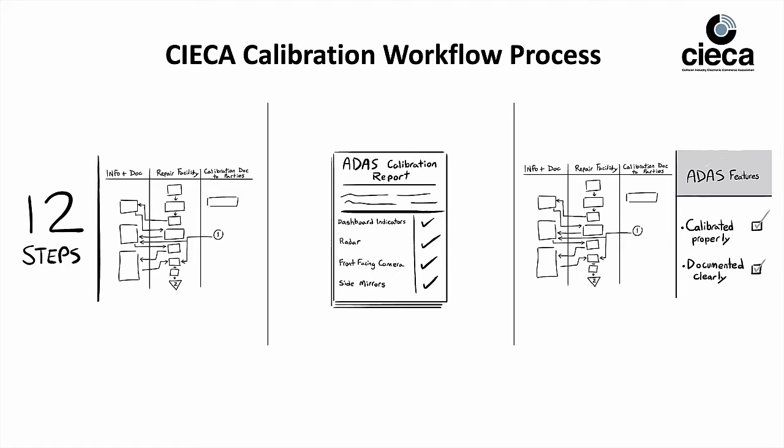The 12-step workflow starts with the identification of ADAS components on the vehicle, and then ends with the final step of completing a final scan, performing a QC process, and then reviewing the ADAS features with the customer.

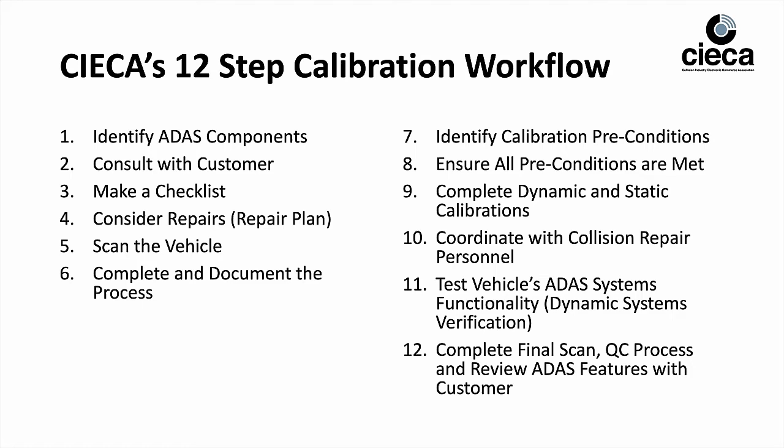In between step number 1 and number 12, you've got consulting with the customer, making a checklist, considering repairs, scanning the vehicle, completing and documenting the process, identifying any and all calibration preconditions, making sure those preconditions are met during the process, completing a dynamic and/or static calibration, coordinating with collision repair personnel, and testing the vehicle's ADAS systems functionality through a test drive, also known as a dynamic systems verification.

Over the past 18 months, my company has developed the industry's first and only end-to-end solution designed to support the implementation of CIECA's calibration workflow.

Our ADAS CoPilot is the industry's fastest, easiest, and most accurate way to identify, locate, and inspect ADAS technologies on a vehicle. Our Calibration CoPilot platform is the industry's best way to offer, manage, document, and invoice for calibrations or other ADAS-related services. And finally, our patent-pending Test Drive CoPilot platform is the world's best way to properly perform, manage, document, and invoice for post-calibration, post-repair test drives, also known as dynamic system verifications.

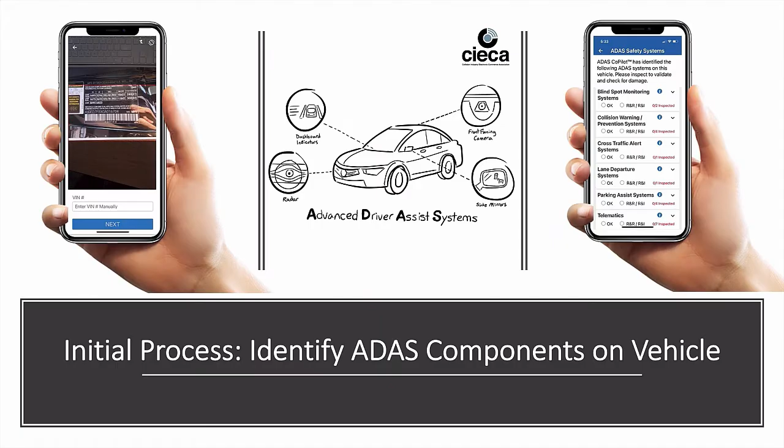As stated earlier, CIECA's first step, or their initial step in the process, is the identification of the ADAS components on a vehicle.

In seconds, our ADAS CoPilot mobile app identifies all ADAS components on a vehicle by simply scanning the barcode. This will save repairers and calibration personnel tons of time.

ADAS CoPilot also provides users guidance on where ADAS components are typically located, to help them locate ADAS components quickly.

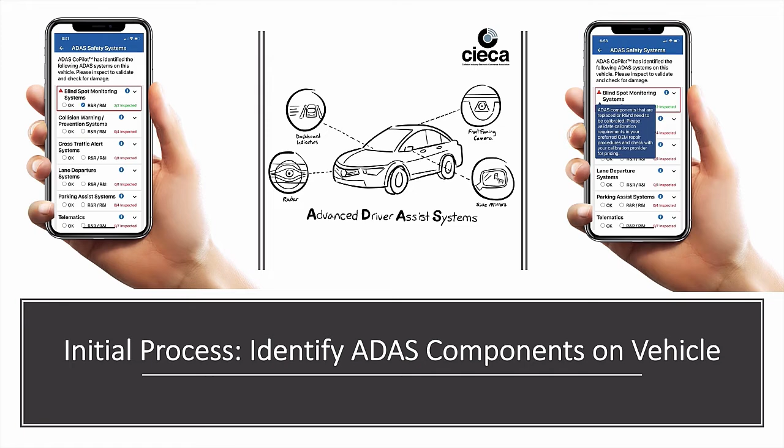Now, if during the inspection of the vehicle the user identifies ADAS components that need to be replaced or R&I'd, ADAS CoPilot will flag that component as needing a calibration. ADAS CoPilot will also then recommend the shop access the appropriate OEM repair procedures and contact their calibration provider for pricing.

The next step: consulting with the customer. We recommend shops use ADAS CoPilot to educate the customer about their vehicle's ADAS systems, the repair, as well as the calibration requirements for that vehicle.

Shops can even share the detailed ADAS inspection report with the customer. Next, make a checklist: the ADAS CoPilot inspection report is automatically created and emailed to the appropriate shop personnel.

We recommend the report get auto-emailed to the shop's repair planner, so he or she can get a head start on research and the repair plan. The report can also get auto-shared with the calibration provider, so the calibration provider can prepare for the calibration and any other services they are going to perform for the shop.

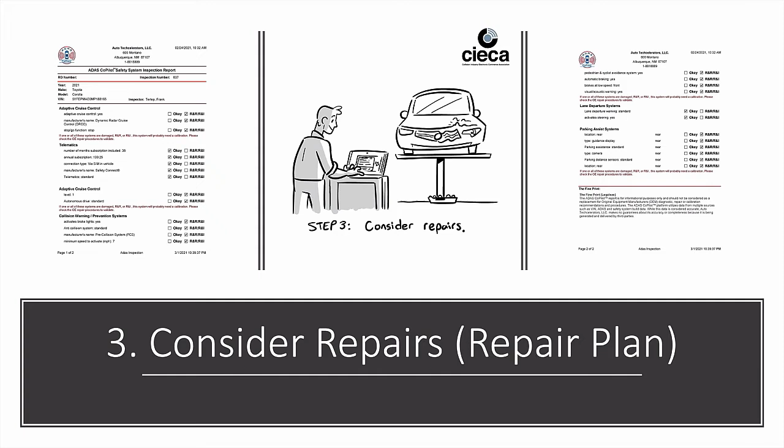Workflow step number 3: consider the repairs. Since the ADAS CoPilot inspection report is auto-emailed to the repair planner, it will reduce the time for that repair planner to do the research and complete an accurate repair plan.

Step 4: scan the vehicle, assess and address any diagnostic codes, and document the results. There's good news: all of our solutions have been designed to work with any scanning solution. So no matter if you use asTech, AirPro, Opus, or any other aftermarket scanning device or tool, it can work with any of our solutions.

Workflow step number 5: complete and document the process. This is where our Calibration CoPilot platform shines. Once a detailed repair plan is completed, the shop, through their CCC ONE system, can schedule the calibration and other ADAS services with their calibration or mobile service provider.

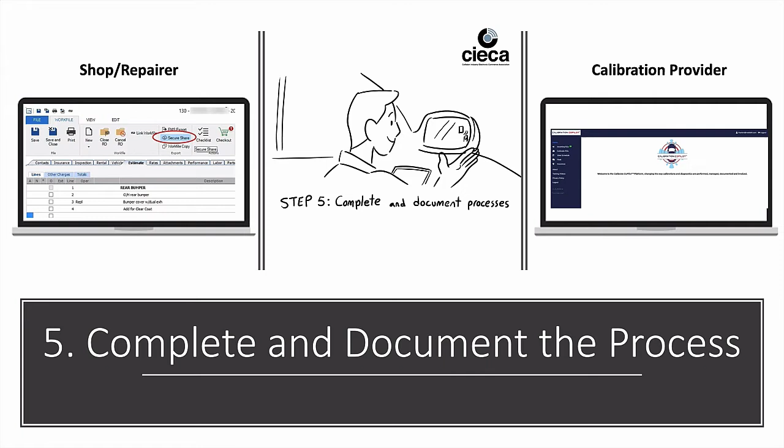The calibration or mobile service provider can receive this service request on their PC, on their laptop, on the tablet they're using for calibrations, or on the Calibration CoPilot mobile app.

The shop can then also use the Calibration CoPilot platform to view pricing and select the services they need from their calibration provider. The shops can also share the RO lines with their calibration provider so the provider knows what repairs were performed on the vehicle they are going to calibrate.

Repairers can then create and download an estimate related to the calibration or other ADAS related services needed on a vehicle. We do this early in the process so the repairer can get early approvals and reduce supplements.

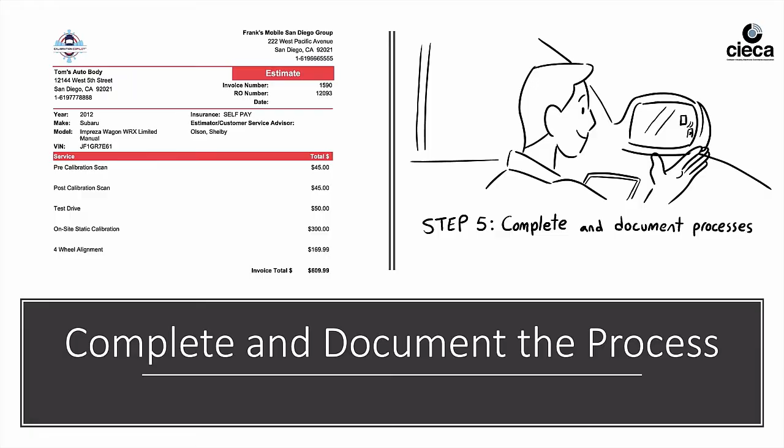CIECA workflow step number 6, perform post-repair scans, address and clear codes. As I stated earlier, all of our solutions have been designed to work with any scanning solution.

Workflow step number 7, identify all calibration preconditions. Our Calibration CoPilot platform provides the calibration or mobile service provider the ability to create customizable precondition checklists that allow for uploading and storing of images, videos, PDFs, and any other file types.

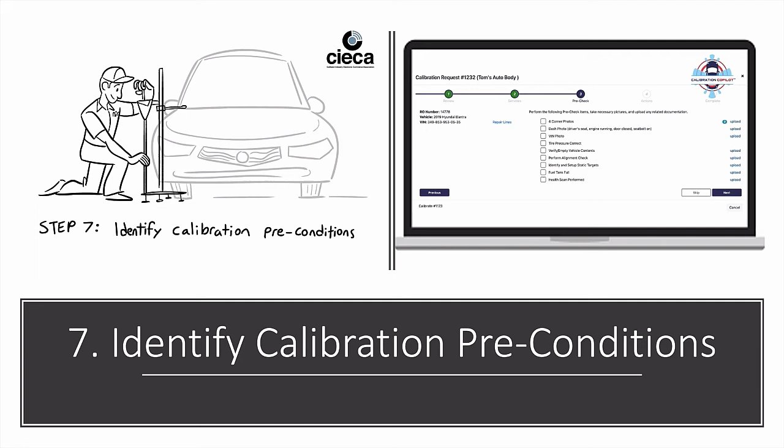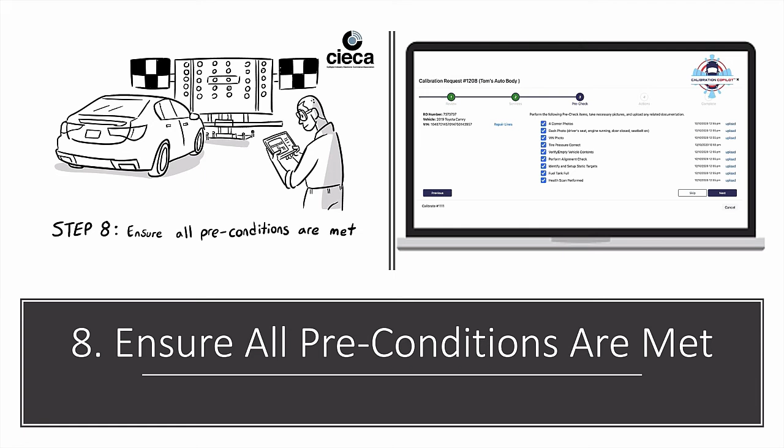Workflow step number 8, ensure all preconditions are met. With our Calibration CoPilot platform, as each calibration precondition is met, they are checked off and marked with a time and date stamp. Images, videos, and other files are uploaded, stored, and immediately shared with the shop or the customer.

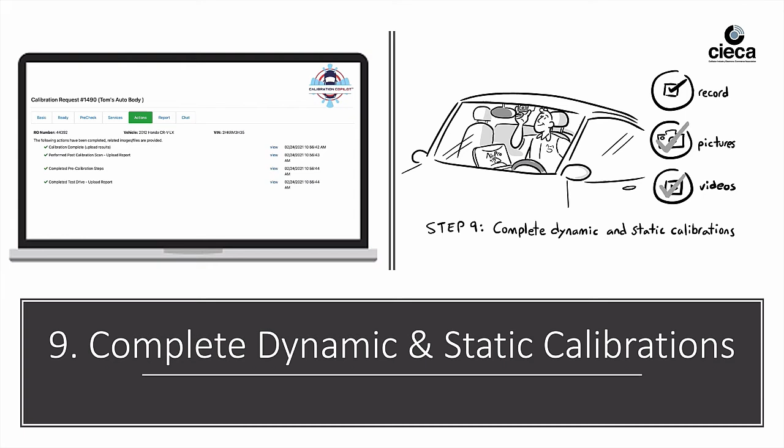Step number 9, complete dynamic and/or static calibrations. Once the dynamic and/or static calibrations are completed, reports, screenshots, images, videos, and other files are also uploaded, stored, and again, immediately shared with the shop. All actions are time and date stamped.

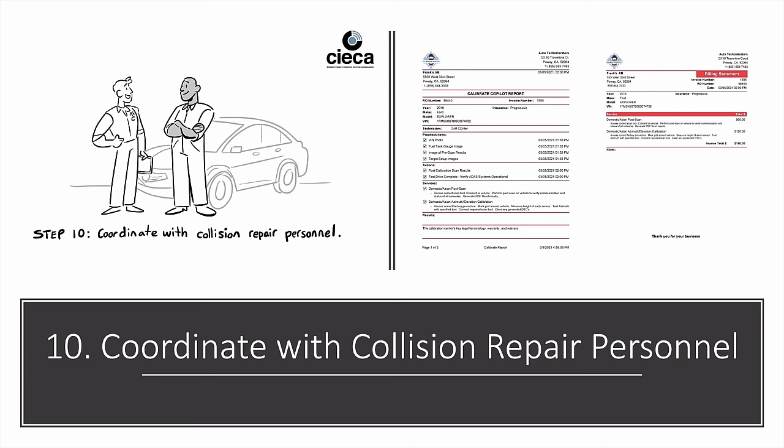Step number 10, coordinate with collision repair personnel. Once the calibration and other services are completed, a detailed calibration report and invoice is automatically generated and shared with the shop. This saves the calibration or mobile service provider tons of time and effort while providing the shop with the industry's best and most detailed calibration documentation.

Each shop also has their own web portal where all calibration and all ADAS service documentation is stored and always available if they're an active customer.

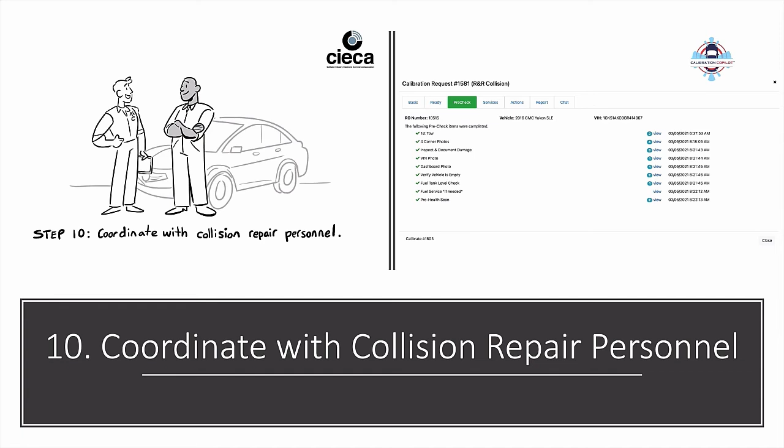Workflow step number 11. Test the vehicle's ADAS system's functionality. Also known as a test drive or dynamic systems verification, this is where the ADAS systems need to be tested to ensure they operate as designed before the vehicle is given back to the consumer.

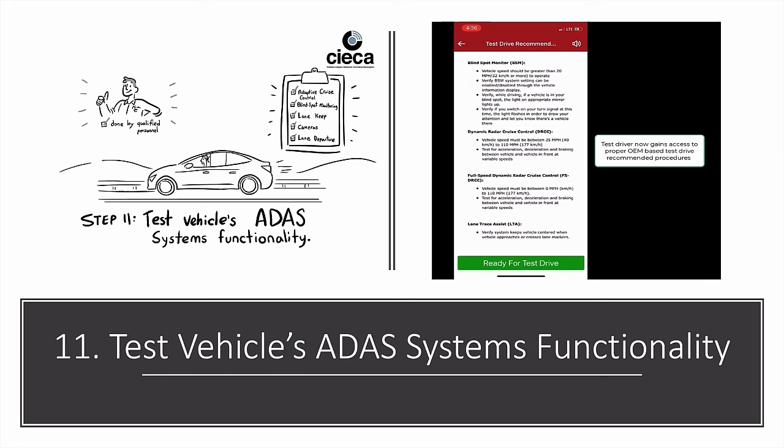Our patent-pending Test Drive CoPilot platform provides OEM-based test drive procedures as well as OEM-based videos. It also records video, audio, speed, time, the person performing the dynamic systems verification, as well as mileage, and also tracks and documents the entire test drive on a map.

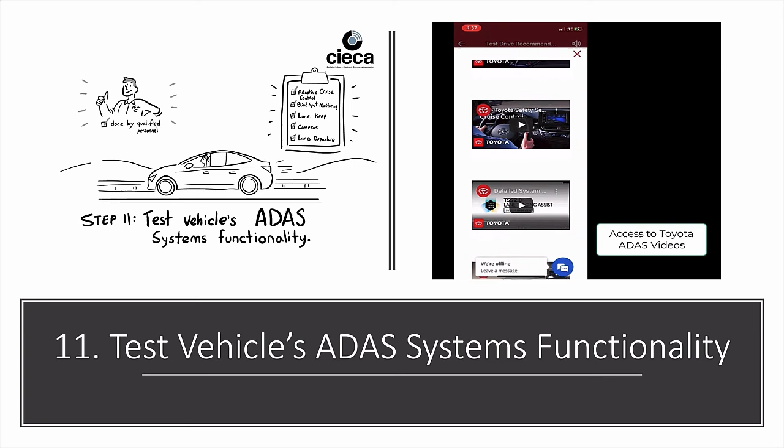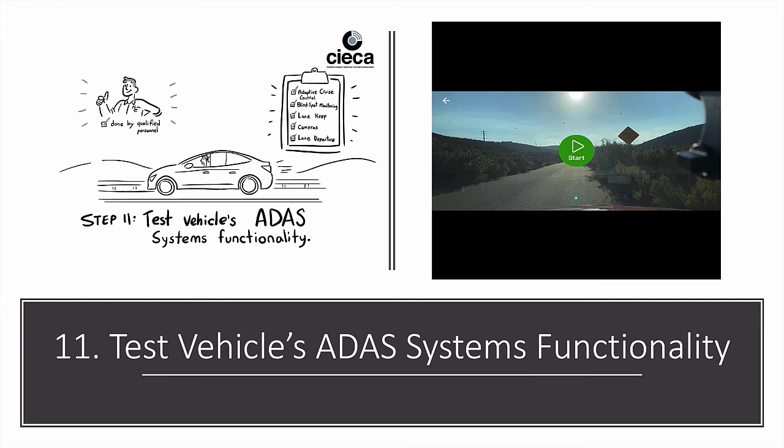Test Drive CoPilot is the absolute world's best way to perform, manage, document, and invoice for test drives or dynamic systems verifications.

Now, the end result of this ADAS systems functionality process is a detailed report that also includes a checklist of all ADAS systems that passed or failed during the dynamic systems verification.

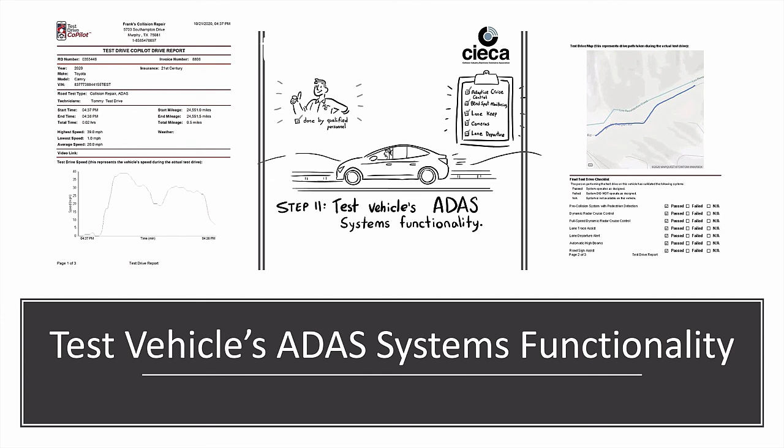Now, because ADAS systems control braking, acceleration, and steering, we believe ADAS repairs can be a life or death event. That is why we developed the ADAS, calibration, and Test Drive CoPilot platforms.

Now, our mission is simple. We want to help the industry properly estimate, calibrate, and validate ADAS repairs to ensure the ADAS systems on an ADAS-equipped vehicle operate as designed before the vehicle owners get the vehicle back after a repair or after a calibration.

Our CoPilot platforms, when combined, deliver the best way to estimate, to calibrate, and validate ADAS repairs and calibrations, and provide the most complete management and documentation platform of its kind.